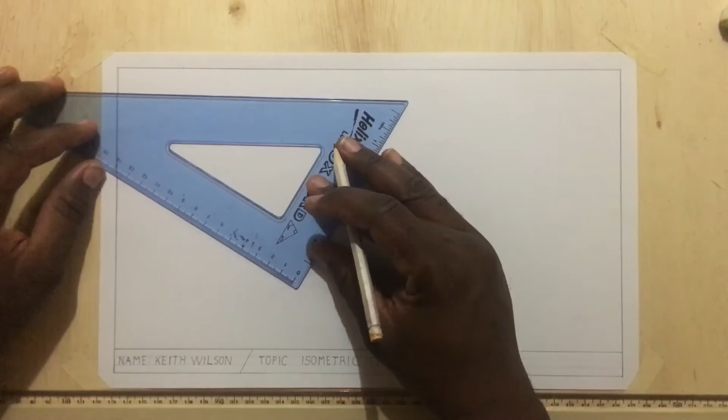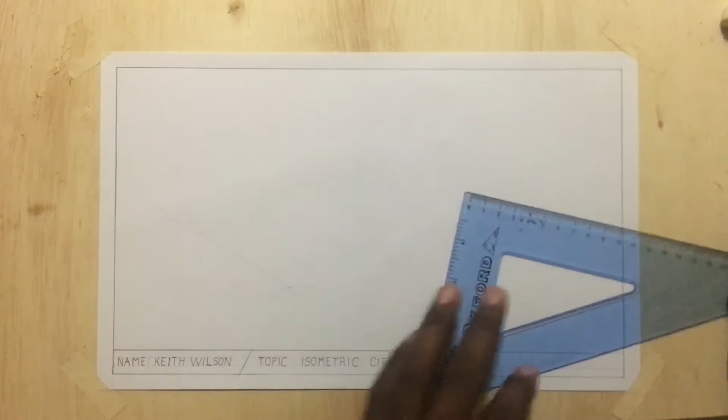And you have to bear in mind in isometric projection, when you are measuring the sides, you have to be absolutely accurate, as this will throw off your results. So I'm ensuring that my isometric square is to perfection in terms of the length of the lines as well as the angles that I'm producing with my set square and T-square combination. If it is off even by a millimeter, the circle will be thrown off.

I'm going to see if I can make my construction lines a bit brighter so that you can see them. But normally your construction lines would be dull, very light lines. So I have now drawn my isometric square. Okay, so that's the first thing you'll do, is to draw an isometric square.

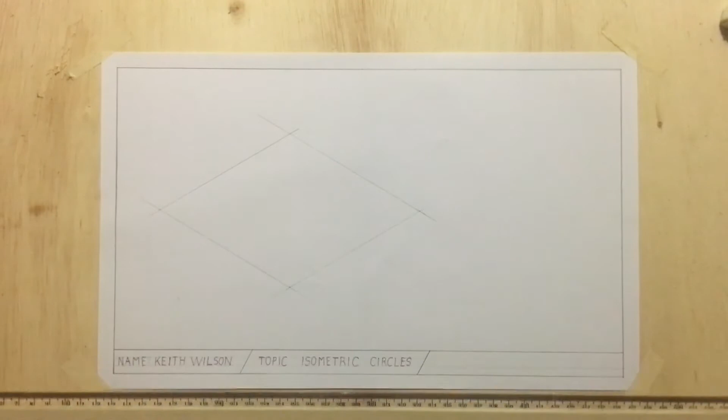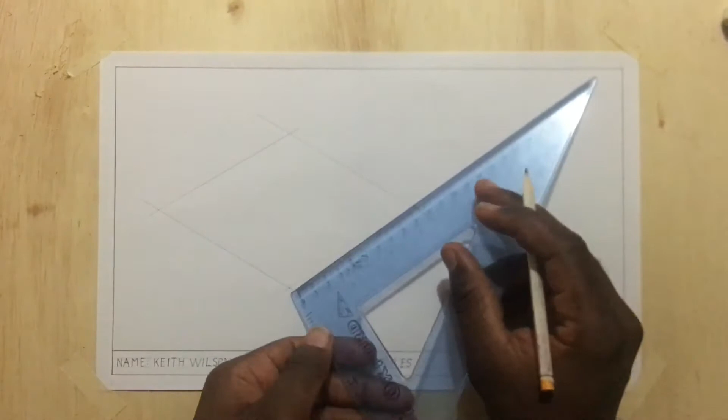The next thing that I will do is find the center of this square, or rather divide the square in 4 quadrants. These quadrants will also serve as quadrants for the circle that we will draw later on. So since one side measures 100 millimeters, half of that side will measure 50 millimeters. I only have to measure 2 of the 4 sides and then transfer the measurements to the other 2 sides.

Now, really and truly, these should be center lines, but some persons use construction lines as well to do this particular exercise. For the sake of this exercise, I'm going to label my points. So I have point A, B, C, and D. I have point 1, 2, 3, 4,

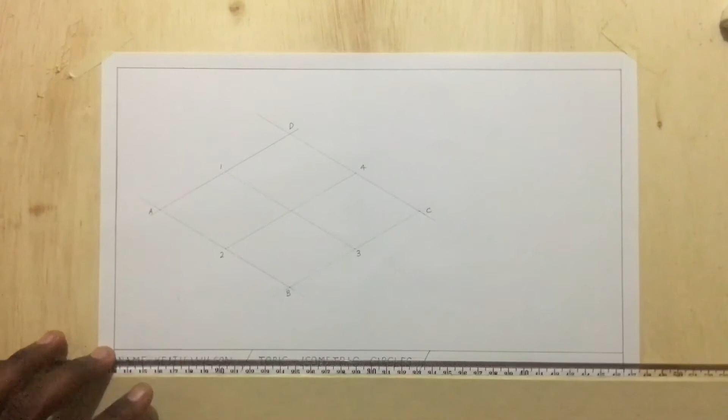and this central point. Okay, so now that I've divided the isometric square in 4 quadrants, the points that are established as a result, points 1, 2, 3, and 4, will be used to construct the circle. Now, I need 2 more points. There are a number of patterns that can be created to achieve the points.

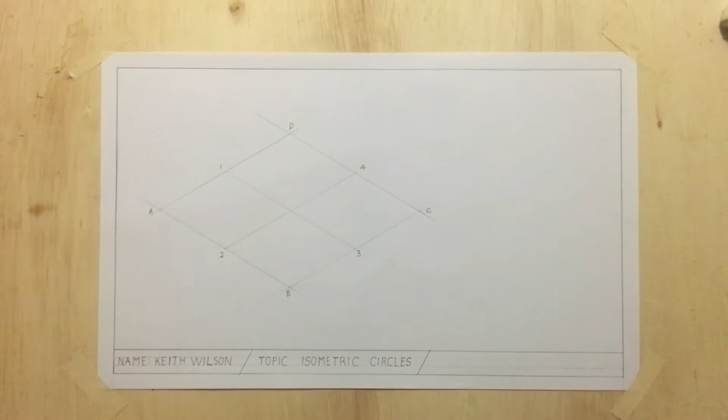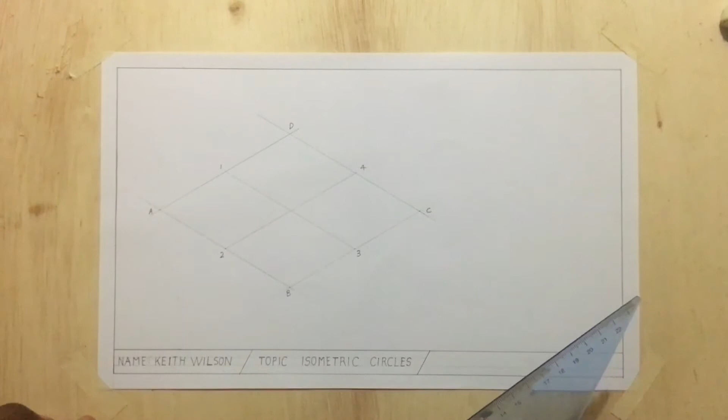Now, I can create a V pattern, an A pattern, an N pattern, or a combination of 2 of these patterns, of a V and an A. So let's start with the A. In all of the patterns, regardless of the ones that you're using, you have to draw the longer diagonal of this shape, of this rhombus.

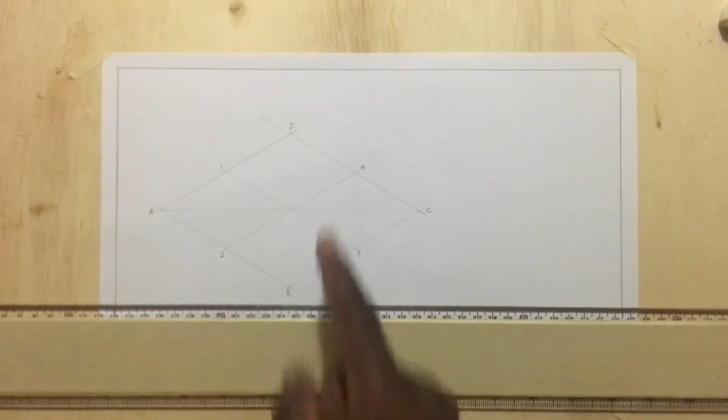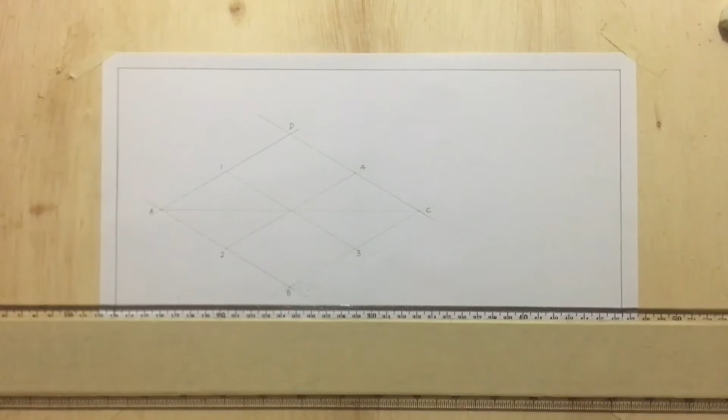Now, since it's a quadrilateral, you will have 4 points, 4 lines, 4 vertices. Now, you are going to connect the longer vertices, which will give you the longer diagonal. So it would not be BD, it would be AC. After you have done this, I'm going to create an A pattern in this scenario. So I'm going to connect D to 3.

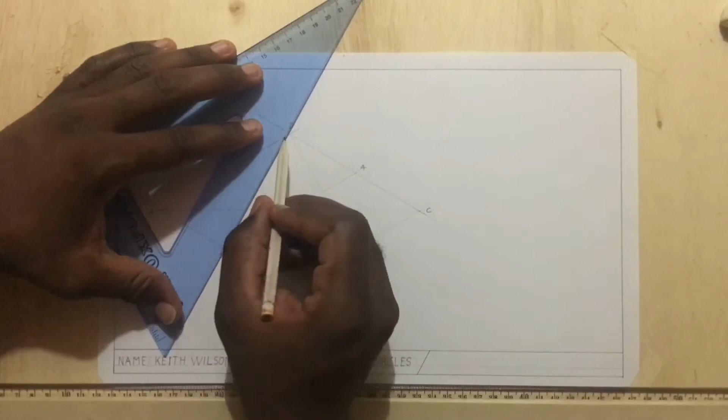So I'm connecting one of the points from the shorter diagonal, which is here, to the two opposite points from the quadrant. So this is a quadrant, this is a quadrant, this is a quadrant, this is a quadrant. So I've gotten my A pattern. Now if I had drawn it from B to 4 and from B to 1, you would have gotten a V pattern. Let's do that.

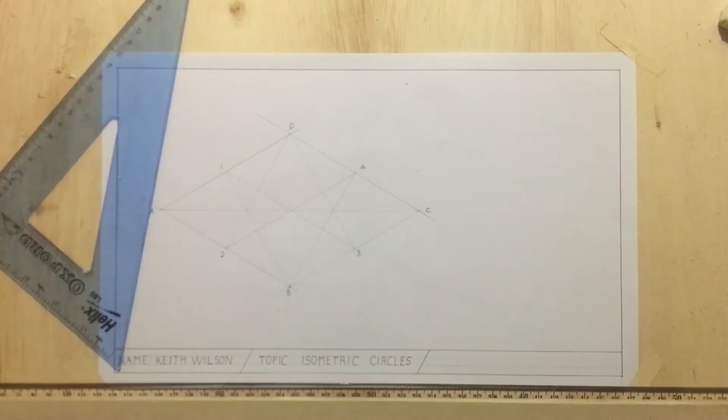So now you have your V pattern. This is the V pattern. This is the A pattern. Now I have a combination of the V pattern and the A pattern. When you have a combination of the V pattern and the A pattern, you can know for sure that this point is correct, because all three lines will be passing through this point. This line, and this line. The same thing for over here. I'll call this point 5. I'll call this point 6.

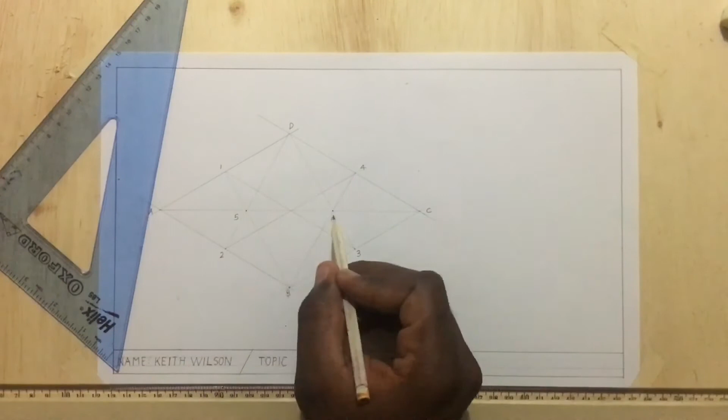Now, you could have just gone ahead with the V pattern or the A pattern, which would result in two lines intersecting at each point, right? But you would have to ensure that your drawing is accurate, which shouldn't be a problem if you're following the correct procedures. However, if you employ the use of both A patterns and V patterns, you will know for sure whether or not your drawing is accurate. And as you can see, all three lines are intersecting, which means that the drawing is accurate.

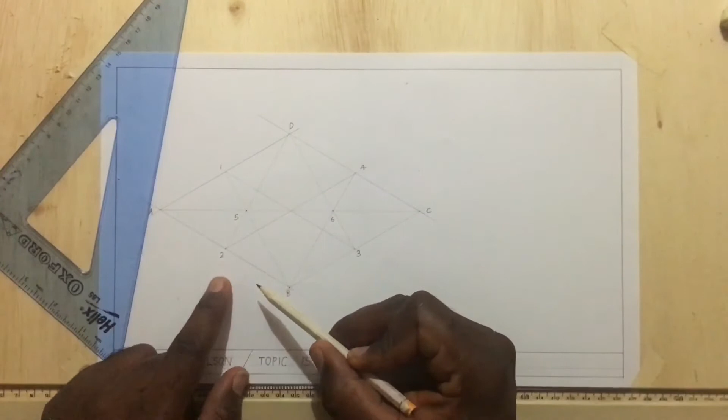Now I made mention earlier about the N pattern, which is this. I call it the N pattern. It's not really an N per se. So you have this, you could have just drawn this line and this line.

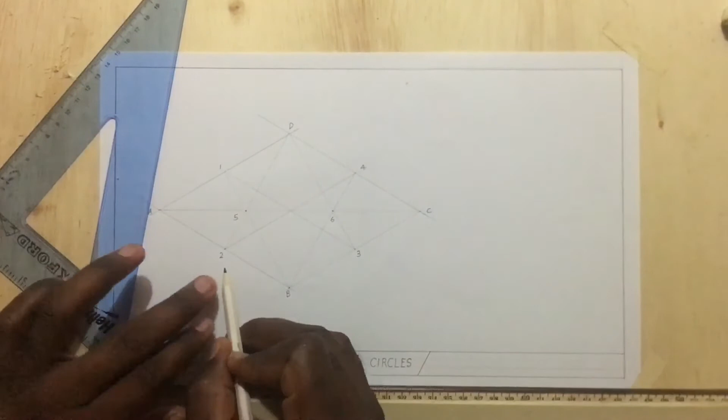There's the N. The N is formed this way or this way. From B to 1 to 3 to D. That's the N in the pattern. Or the reverse: D, 2, 4, B. Now, the aim is to get this point. So you could have just drawn the V to get this point and this point, or you could have just drawn the A, because the A and the V would intersect with the longer diagonal to give you the points.

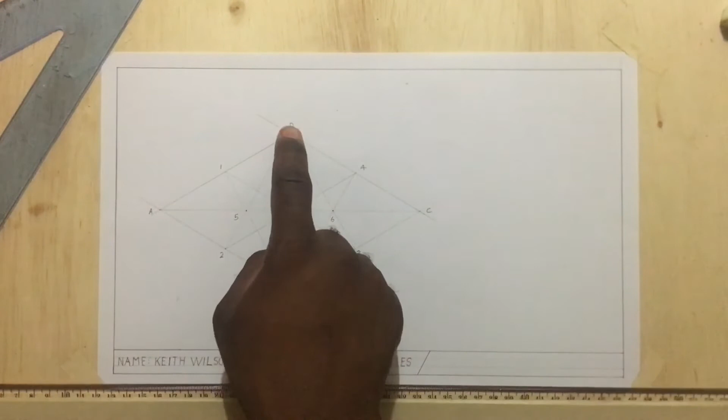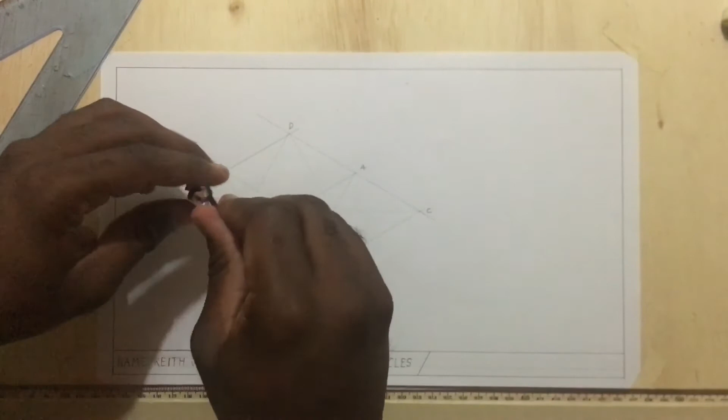So let's go again. Now it's time to utilize our compass. Now, in utilizing the compass, you are going to use the following points: point B, point D, point 5, and point 6 in this rhombus that is formed here. Okay, so let's start off with points 5 and 6. Point 5, you're going to draw an arc from the closest points to 5. So I'm putting my compass point at 5, I'm opening it to 1. 1 and 2 are the closest points to 5. Right? Closest numeric point and closest point overall.

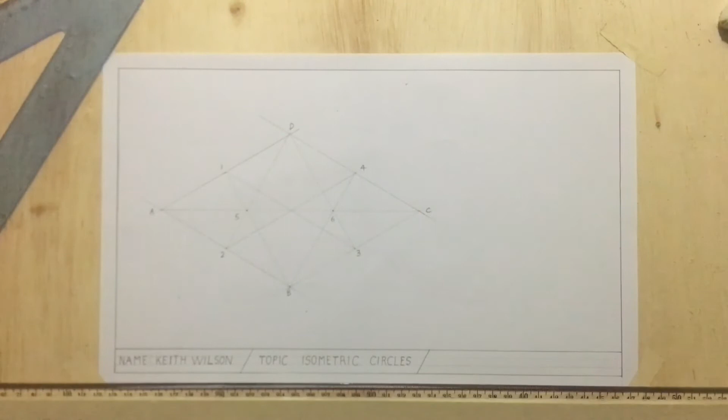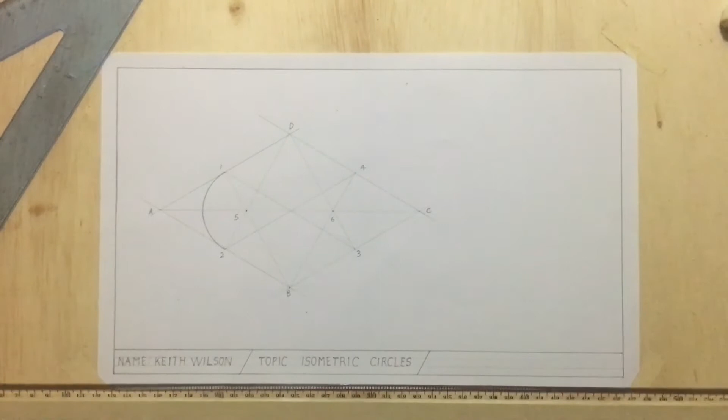Now, if your drawing is accurate, when you swing the arc from point 1, let me tighten my compass a bit. Now, when drawing isometric circles, the better your compass, the better the result. When drawing from 1 to 2, if you notice that they are not connecting, it means that your drawing is somewhat off. So let's see if mine is correct. And you are pressing on the pencil because in this case, the circle needs to be bright. So, my drawing is accurate, or at least for the most part. You will not be able to see any form of inaccuracies from what I'm doing based on the camera. So, if for some reason the arc is not lining up with the points, it simply means that your drawing is inaccurate.

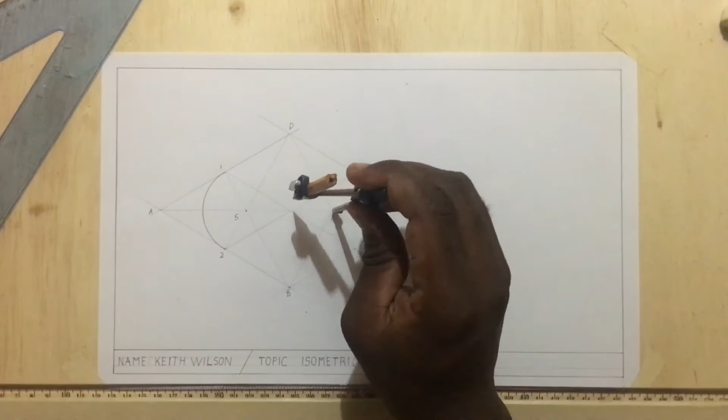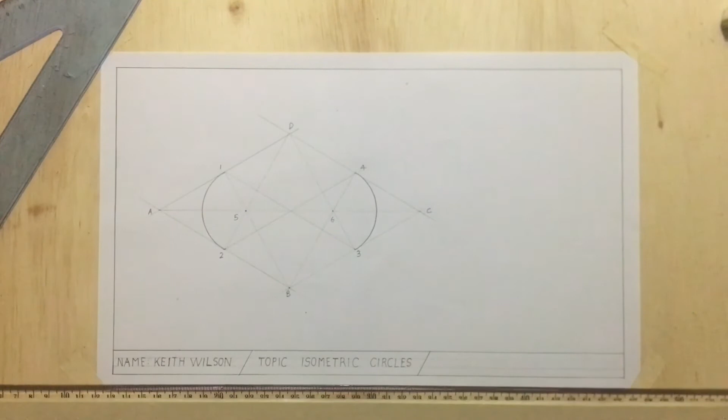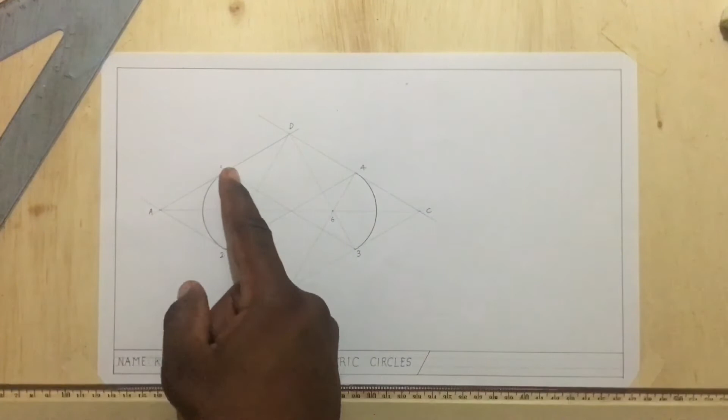Let's go over here. I should not need to change the arc. So point 6 would be connected to the 2 labeled points that are closest, which are 3 and 4. And there it is. Now, the next 2 points that I'm going to use are points B and D. So earlier we used the points A and C to draw the longer diagonal. Now, the opposite points that are closest together in the square will be used to finish off the circle. Notice this quadrant, use a small arc. This quadrant, use a small arc rather. Now large arcs are going to be used at point B to connect 1 and 4.

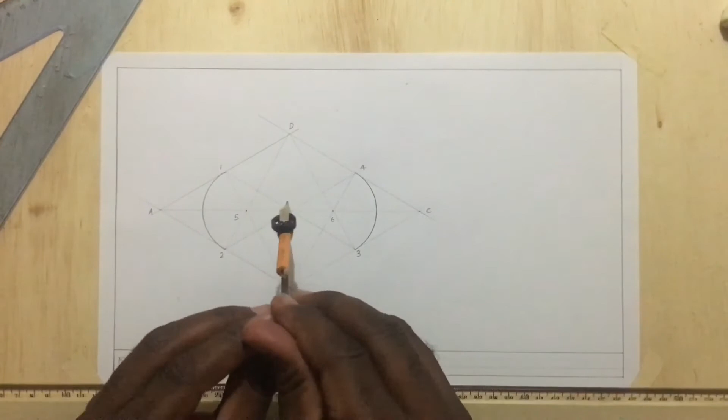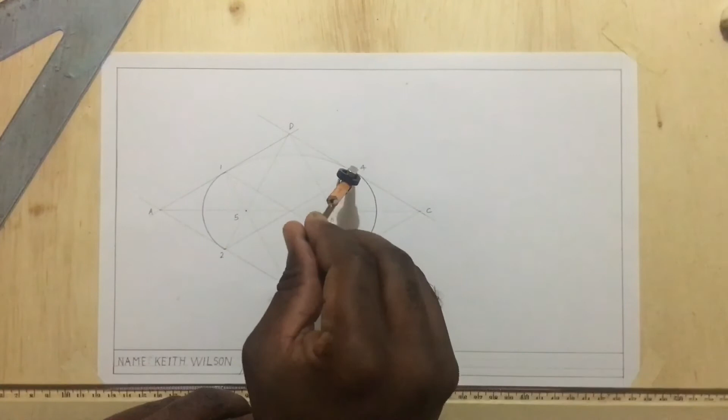You have to ensure that the compass that you're using is able to stretch, and you have to ensure that it doesn't shift in the process. So it's going to connect 1 to 4. And the last, let me brighten that a bit. Brighten that some more. And the last arc that I need to draw will be drawn by placing the compass point at D and drawing it from 2 to 3. I have a little issue with the compass point here. Come on, compass. Okay, here it goes. Now this is where a very good compass will show up a very poor compass. Now this is the final arc. So there you have it. An isometric circle.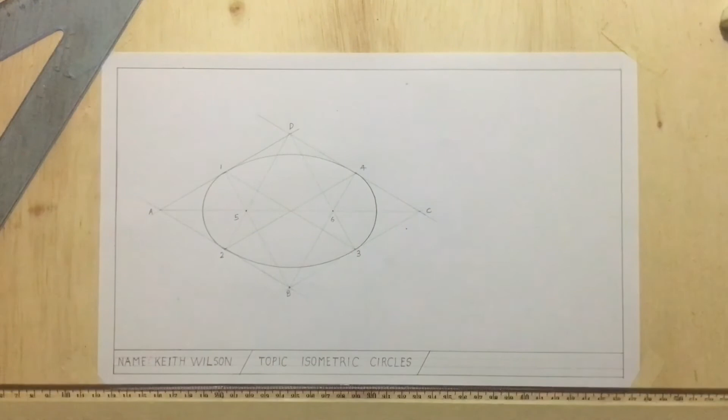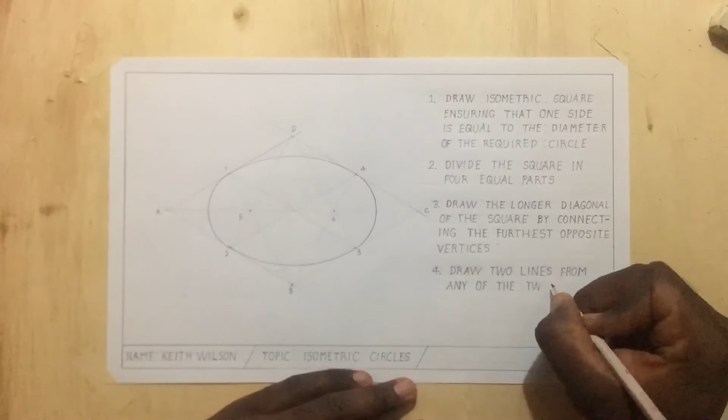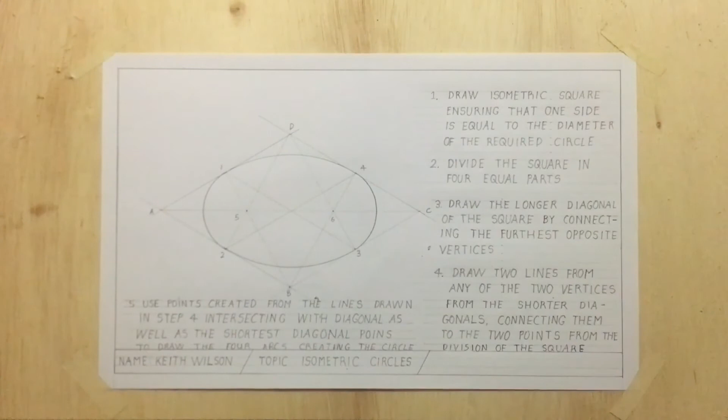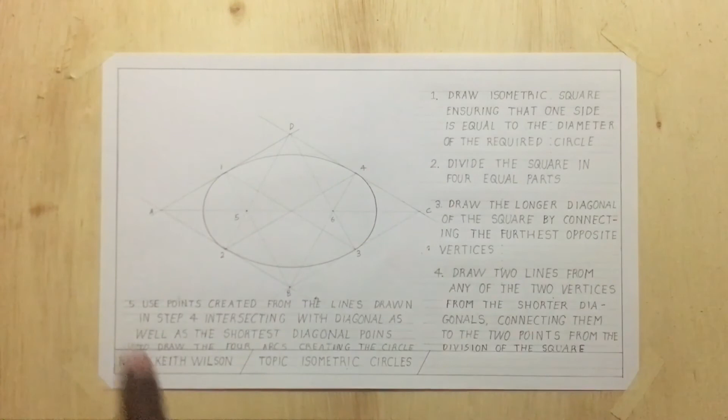Now let's review the steps. Okay, so let's recap. So the first thing that we did was to draw an isometric square. And in doing so, we have to ensure that the diameter of the circle that we want is equivalent to the length of one side of the square, as stated here. Next thing that we did was to divide the square in 4 equal parts. The third thing that we did was to fill in the longer diagonal, right? By connecting the furthest vertices. These points are vertices, one vertex, multiple vertices, of the square. So A and C are furthest apart, B and D are not as far.

Then we draw 2 lines from either of the 2 vertices of the shorter diagonal. This is the shorter diagonal. We can use any other points, ensuring that the lines connect to any of the 2 points that result from the division of the square. So B will be connected to 4 and 1. You could have done D to 2 and 3. You could have also done D to 2, B to 4, or D to 3, B to 1. Any 2 points should give you 5 and 6.

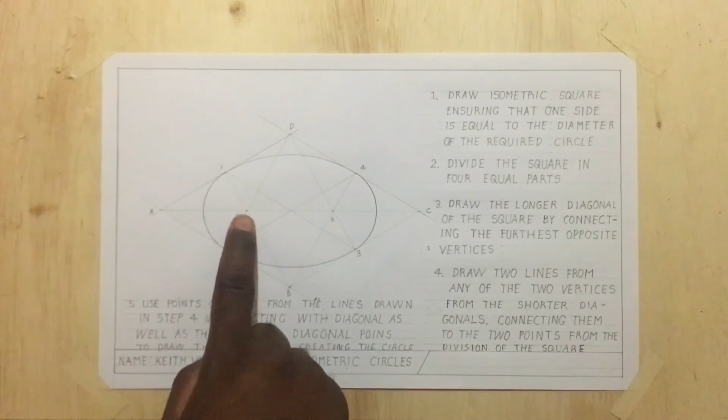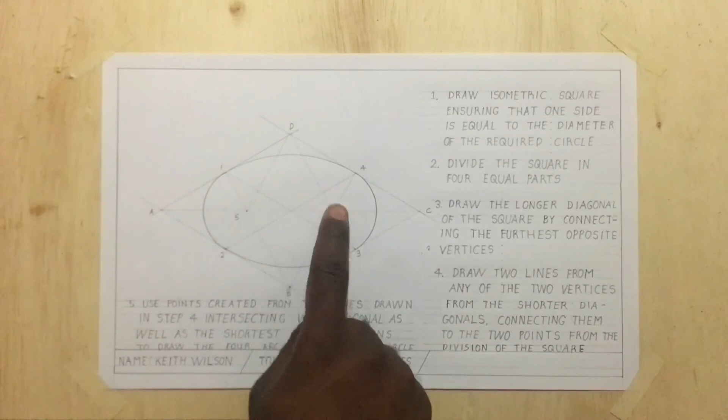Once you have done that, we can now proceed to use these points mentioned here, as well as this point and this point. So the points created, 5 and 6, will be used to draw the smaller arcs, while the points on the vertices will be used to draw the larger arcs. Please note that once you note all of those little pointers, you will be able to draw the isometric circle with ease. I hope you guys learned and grasped the concept that was taught today.